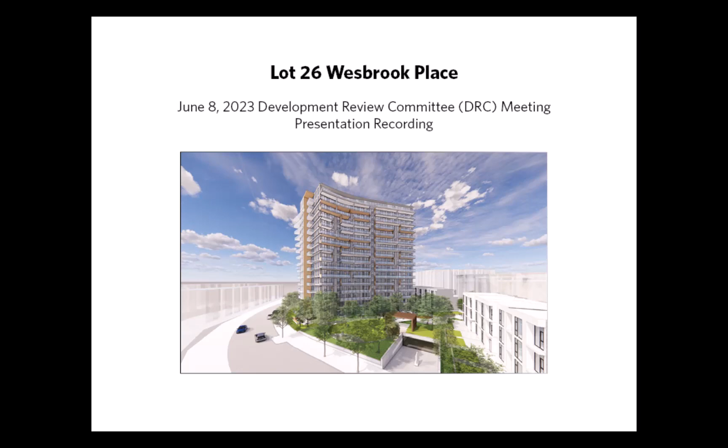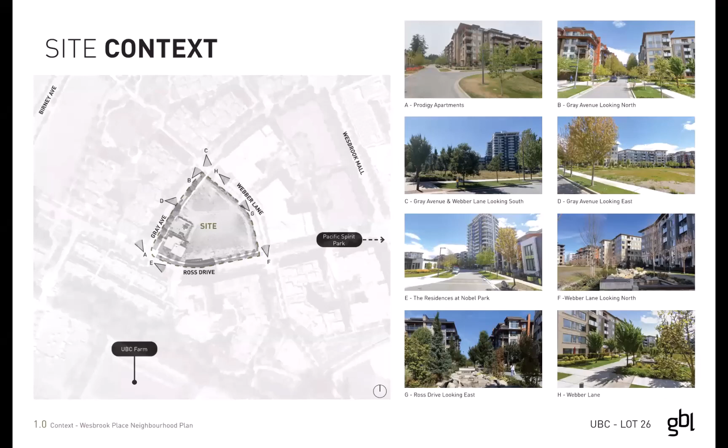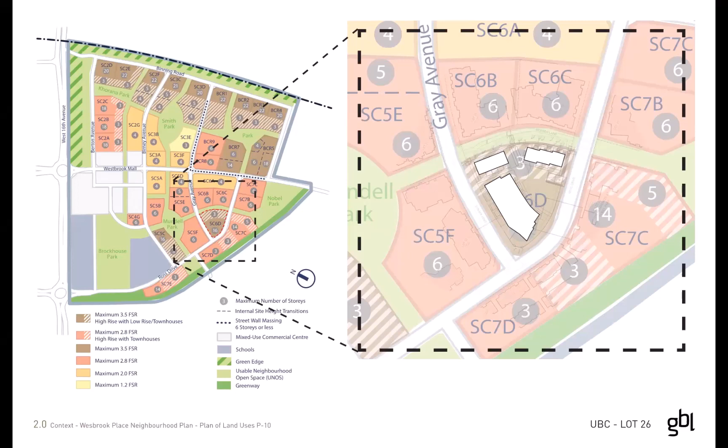As introduced, the project is Lot 26 here at the intersection of Ross, Gray, and Webber Lane, in a triangular site. Most of you are familiar with this project from the presentation about a month ago, which is allowing a 16-story tower and 3-story townhomes along the lane with a permitted FSR of 3.5, the site area of 48,000 square feet, and a permitted net area of 168,000 square feet.

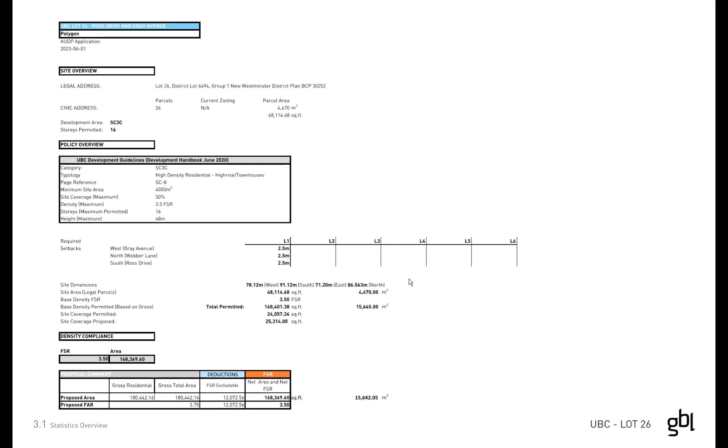The stats will be available in the package to review in further detail. The presentation here proposes the same number of units and generally the same arrangement as previously, so I want this presentation to focus on many of the positive changes we've made since the last presentation. This package largely reflects the presentation at the design panel last Thursday.

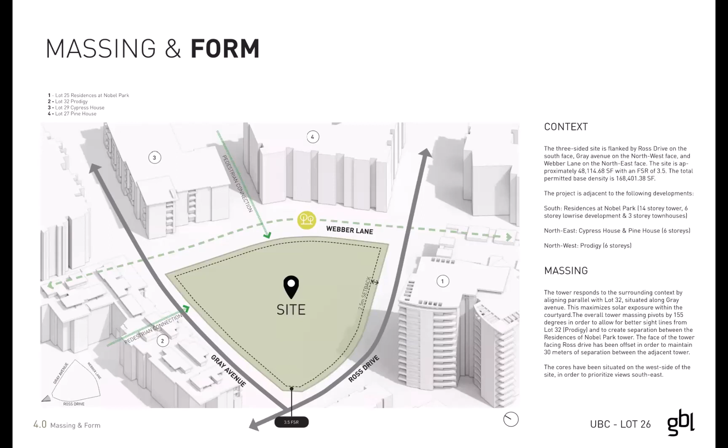The general form of development for the site was to take that 16-story volume and 3-story townhome volume and orient them on the site consistent with the setback along Gray Avenue, opening up a courtyard facing Ross Drive. We felt it was important to open up sight lines to neighboring projects and let the project breathe at the intersection of Ross and Gray.

We've introduced this pivot, which also allows us to create the entry for the main residential. We've then taken the tower separation from the neighboring Nobel residences at Nobel Park, set back the tower the minimum 30-meter tower separation, and then split that length in two to break up the massing on that short side.

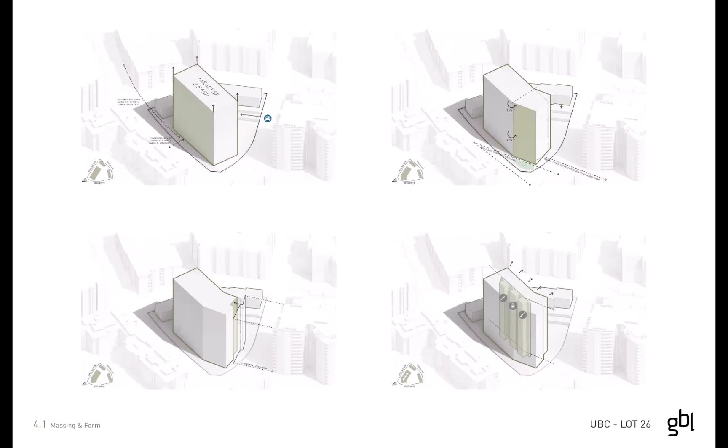We think there's a great opportunity for views all around the site, but in particular facing onto the courtyard with views out to the ocean and beyond was a prioritizing factor in our decision to locate cores towards the Gray side of the building, opening up those views beyond.

Our key design parti has been the building interfacing with this unique position that Wesbrook has, which is both facing the city and its urban context, but also embracing that nature. That becomes this duality upon which the building is split along its long axis.

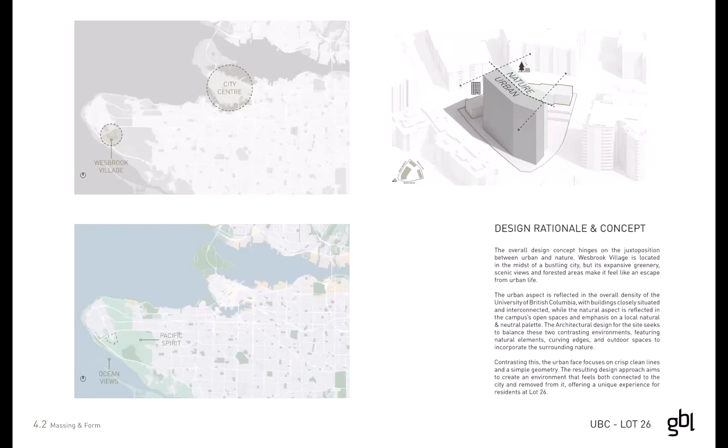Facing the urban side, we really want to articulate the verticality. We've introduced these slots and breaks in the massing to break down that long face, in addition with that hinge, which also helps to reduce the overall length of perceived massing.

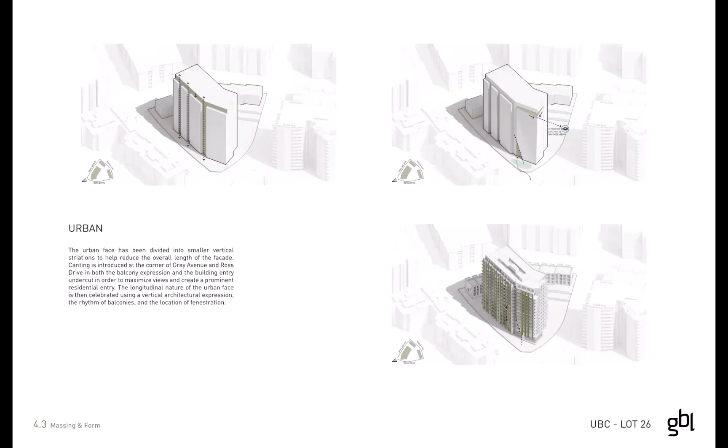And then to really have the building embrace that opportunity to embrace nature, to embrace the ocean, with a canted balcony expression, which also gives way to this sort of curtain that peels back to reveal the residential entry. And then on the other side, we express a more horizontal expression.

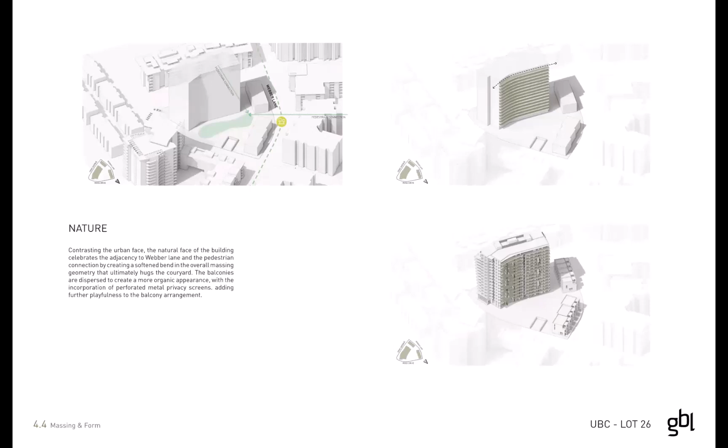Again, we use balconies and privacy screens to break up that massing, introducing a playful rhythm, which we feel is really about embracing those views and increasing livability as the main aspect of that nature parti.

Based on feedback we got from the pre-application AUDP and further comments, this is a brief summary of the main changes we've made. We felt like we really wanted to articulate that verticality, so we've removed that somewhat artificial 6-story brick base, which we think has really strengthened that response to the parti.

In response to some of the concerns about thermal bridging and sustainability, we've reduced some of the cantilevering balconies on the upper floor, which also accentuates our verticality by removing some of that top-heavy nature of the design.

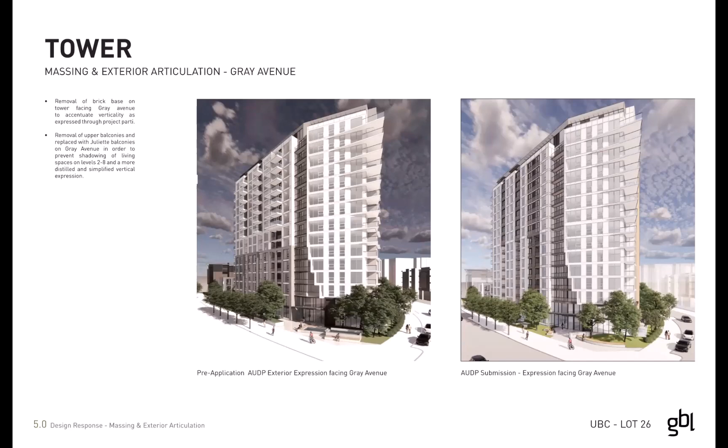In terms of materials, we had a response that maybe some of the materiality could be brought around from the nature side onto the urban side, so that there's a consistent, uniform approach to materiality while still respecting the two different architectural natures.

One of the primary ways we're achieving that is a perforated metal screen, which we have in a bronzy champagne color. We think there could be two different textures applied, which respect the urban side and the nature side: one which is maybe more geometric or rectilinear in pattern, and one which is more organic, circular, and so forth.

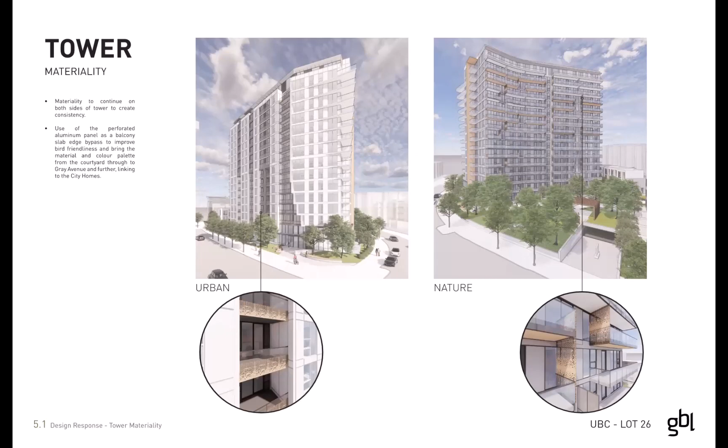In terms of the relation of the city homes to the tower, we wanted the material language to be consistent so that it really integrates the townhomes into the tower design. The city homes have moved from a concrete design, which we initially envisaged, to a wood frame, and we think that's certainly an enhancement from a sustainability point of view.

Here we've also aligned the setback of the townhomes with the tower, which allows for a planting buffer and adequate at-grade bicycle parking.

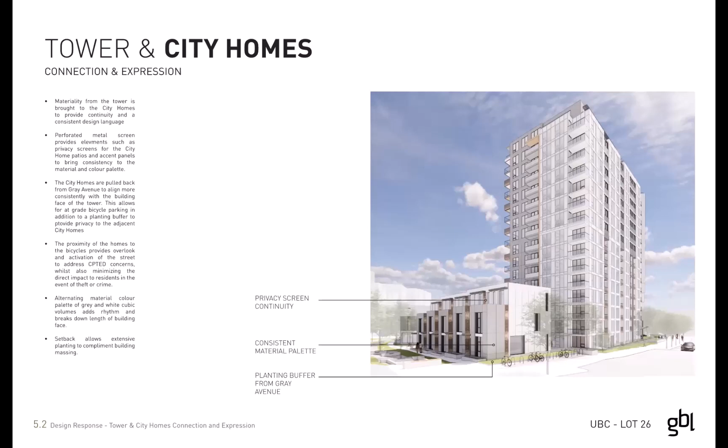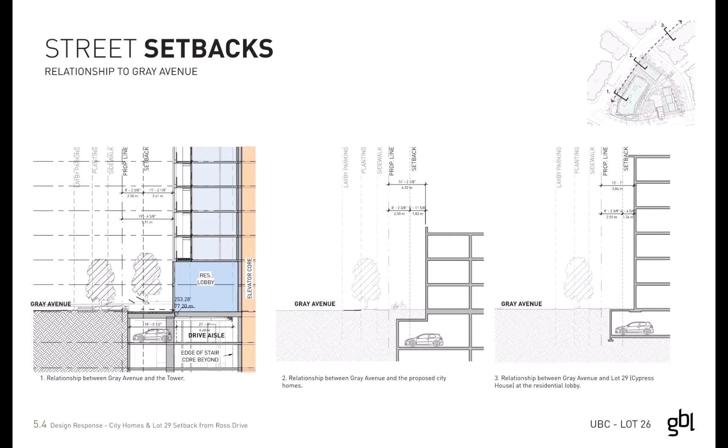We've looked into that street setback relationship. One of the primary motivations for the location of the tower was that we can get the core locations, the drive aisle, and an efficient parking layout, which is dictating where our cores are, and then obviously the livability of the units above. We think this setback is consistent with the intent of both neighbors. On the left we have the tower relationship, the middle the city home relationship, and then a neighboring project, Lot 29, just up the road, to show that it's relatively consistent.

Within the parkade, we've tried our best to locate as much bike parking and accessible features on P1. Then we go down to 3 levels of underground parking.

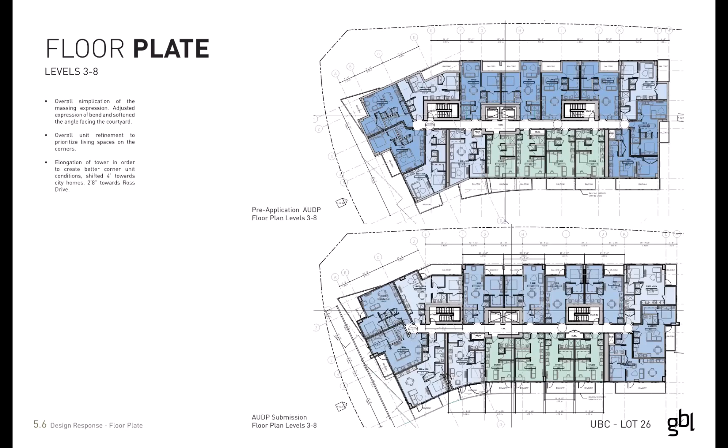On the floor plan, we've looked to elongate some aspects of the floor plate, which has allowed greater livability of the units in response to previous comments. We've also enabled the left-hand side of the floor plan below to expand in width a little, just to remove pinch points and improve the overall livability of the units.

On the upper floors, we've put more design development into ensuring a range of 3-bedroom, larger bedroom units on that top floor. And around the building, we're taking greater care to remove any unnecessary slab extensions and pay greater attention to overall energy efficiency, which will be reflected in further development with the energy model as the design progresses.

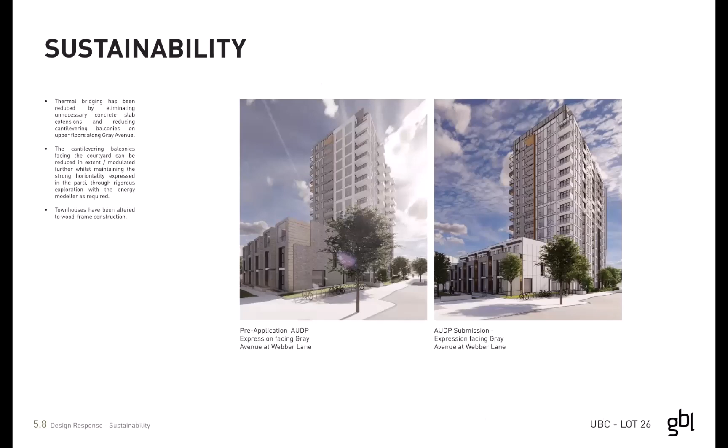There are some improvements from a sustainability perspective in terms of moving to the wood frame on the townhomes and the removal of those cantilever balconies.

There's a number of CPTED-related responses in terms of maximizing the activation of the ground floor plane. We've got a pathway leading from Ross to Gray along Webber Lane with active frontages of the city homes, an activated frontage with highly glazed amenity wrapping around the intersection of Gray and Ross, and a double height entry lobby with standard security fob access entry phones to the parkade.

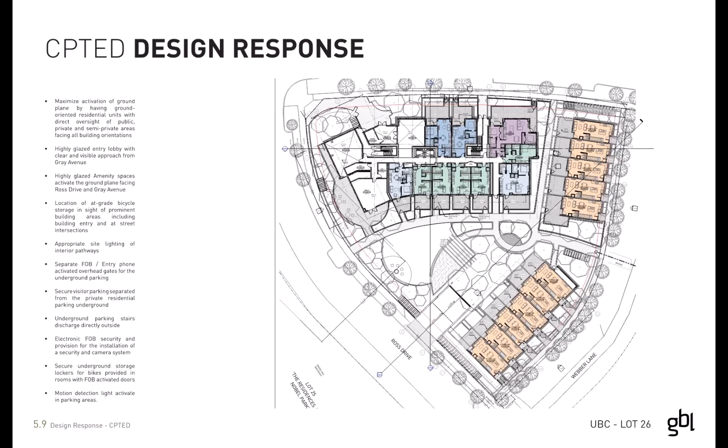Generally the material expression has remained the same since the last review: articulation through a window wall system with a muted, simple, largely monochromatic composite aluminum metal panel, and an accent color coming through as the balcony privacy screen.

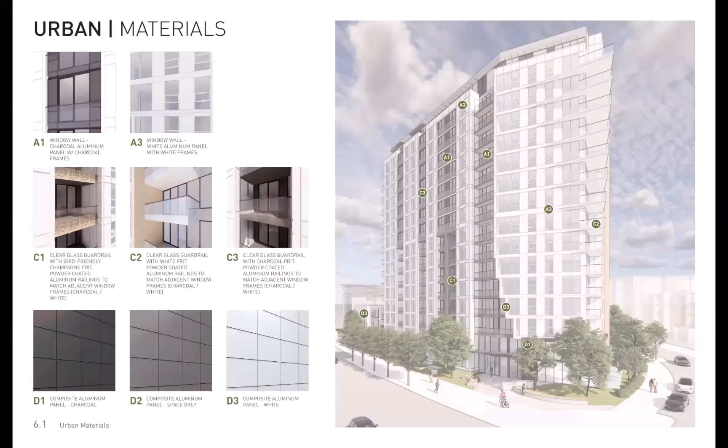Another simple approach, but with a bit more warmth to reflect the natural side facing the courtyard. Explorations into what that perforation might be and how we might approach the two different sides of the building with two different material approaches.

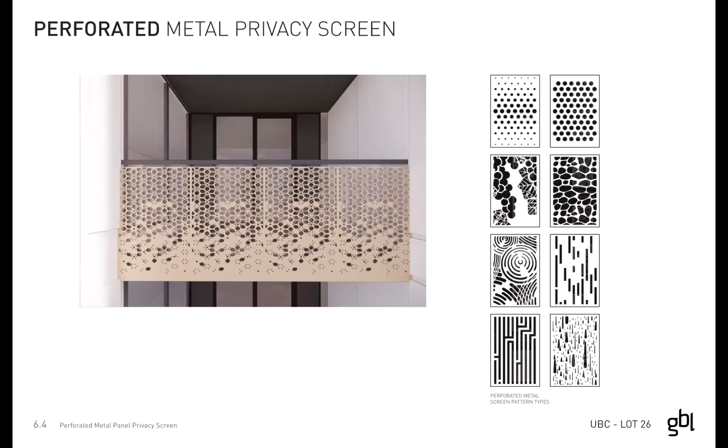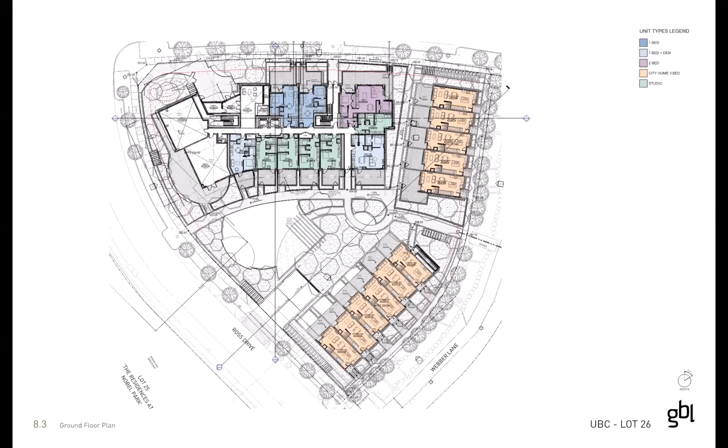An overview, which I'm happy to go back to if any questions arise, for the general arrangement of the floor plans.

The elevations calling out those materials: the Gray Avenue side with that vertical expression and monochromatic difference between light and dark, and the curved side facing the courtyard.

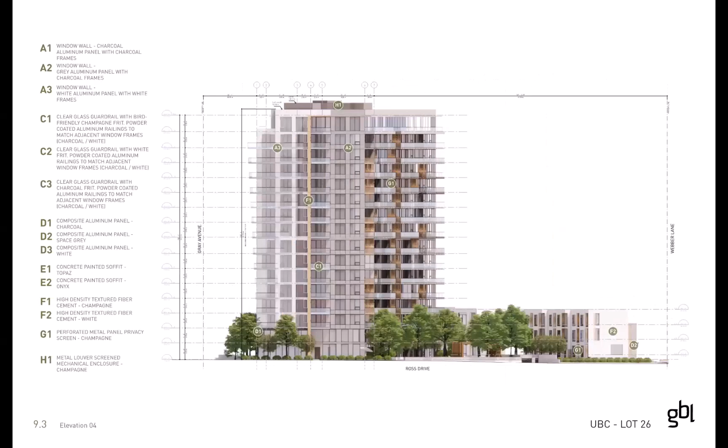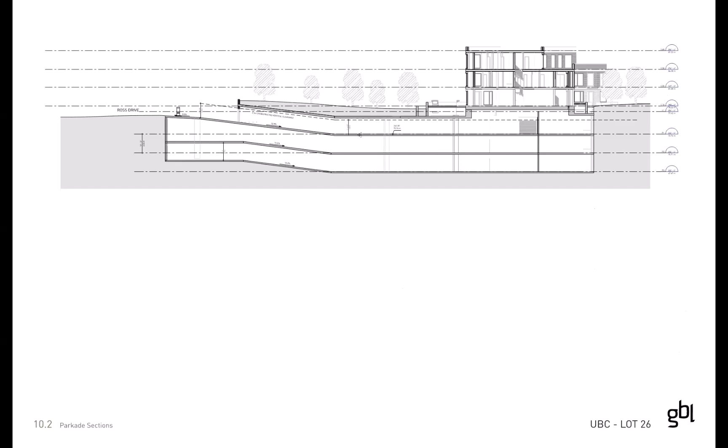Sections of the building showing its relationship to the street and the setbacks. We're trying to minimize the impact of the parkade entry facing Ross Drive by bringing that concrete slab out as far as possible so the entry is concealed, creating a landscape berm, which Sarah from HAPA can talk more about, along with any future screening techniques to better integrate that into the project as a whole.

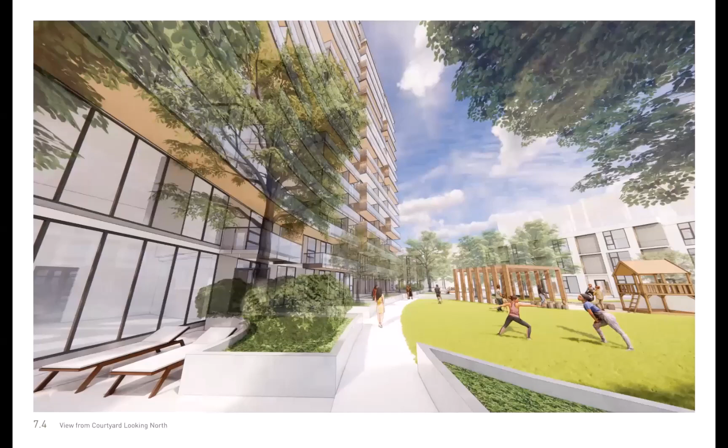Happy to go back to any of these in the future, but here's some 3D imagery. I think that's the final image from architecture. Thank you.

Yes, so can everyone see this now and hear me?

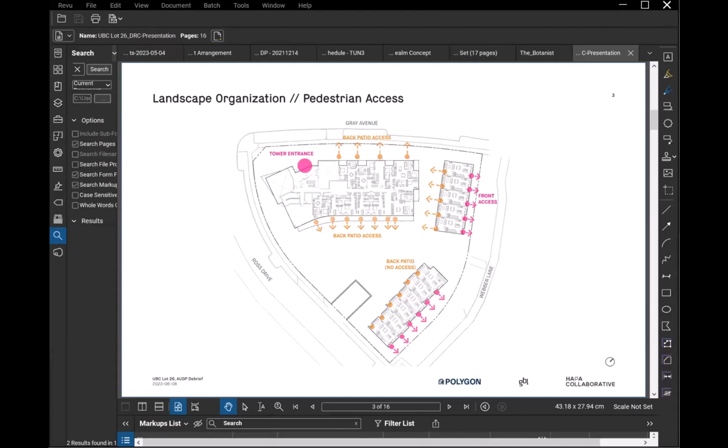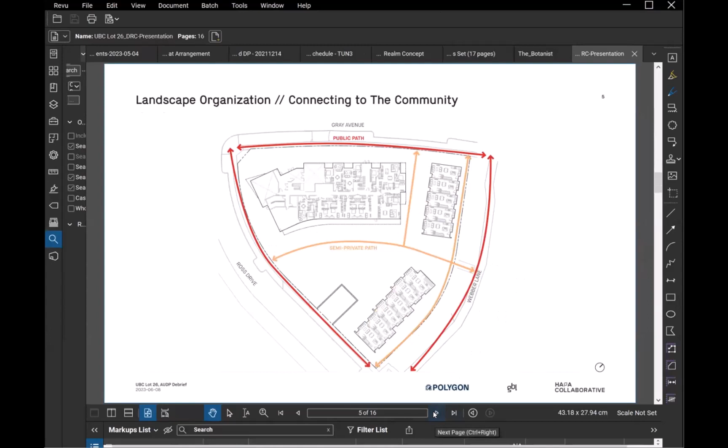I'll just go through this really quickly since there are no really major changes: the organization of the entrances, the parking access, and we have these nice through pathways through the site, with a general kind of hills around the edge and valleys in the usable spaces, conceptually.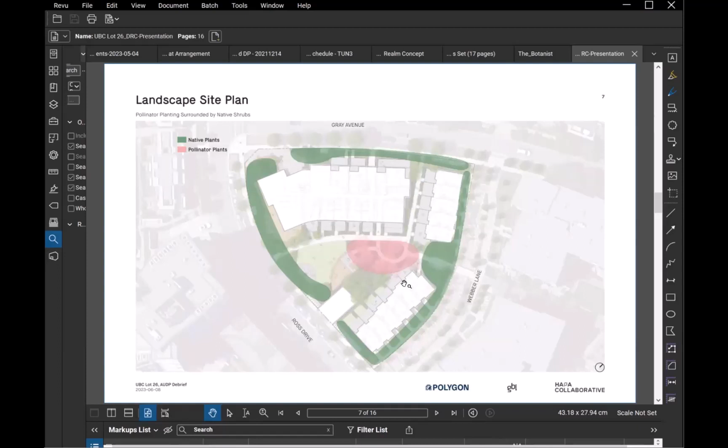We've developed a planting plan with a lot of focus on more native plants around the edge and more pollinator-friendly plants in the middle. I think it has a lot of habitat and pollinator value, but the native plants would be maintained a little more neatly than an actual forest, while still retaining that habitat value.

Trees framing entrances. The main focus of the landscape is this internal backyard park-like communal space with a small tot play area, a trellis, a lot of seating, a fire circle, and a deck that could be used for dining. We've also created a little public mini plaza at the lobby entrance, and a pathway along Webber Lane with nice access to this landscape feature.

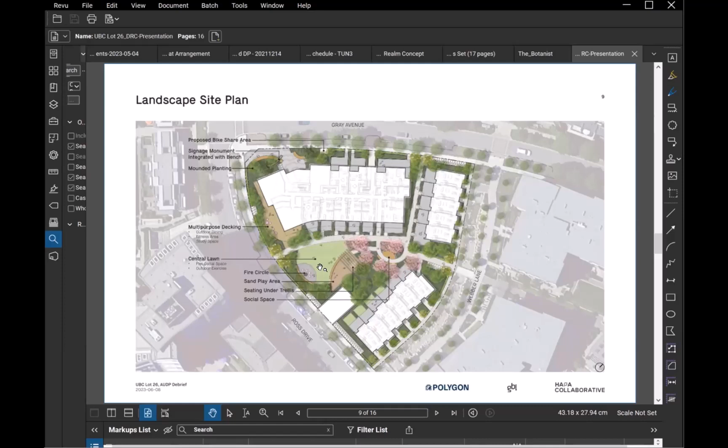All the through public and semi-public pathways are less than 5% grade and there are no steps, so they're accessible and gentle. Generally the site is fairly well planted, and stormwater that falls on paved areas is mostly directed into planting areas as much as possible.

I think that's all I wanted to point out, but if you have more questions about specific plants or anything, I can go back. Lighting is mostly achieved through lights set into the walls through the site, and then some sections. And that's it.